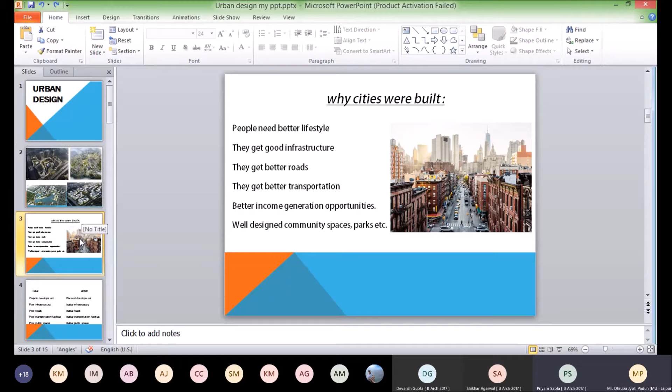So see, when you talk about urban design, these type of images comes to our mind, right? Buildings, transportation, roads, high quality green areas, parks.

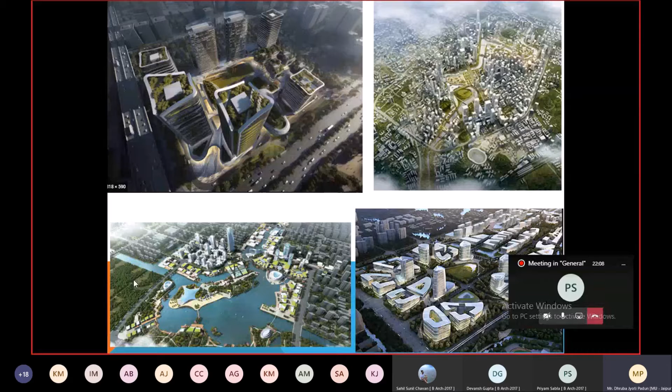So we have discussed these things. The cities where people need a better lifestyle, they get good infrastructure in cities. They get better roads, better transportation system, better income generation opportunities, well-designed community spaces, parks, etc. So these are some reasons why cities were built when they started to get civilized.

Okay, so let's see the difference between the rural area and an urban area. We have discussed how rural settlement is more organic in nature, and in case of an urban settlement, it is planned. In rural areas, we get very poor infrastructure, poor buildings, poor roads, poor transportation facilities, poor public spaces - poor because these are not properly designed or not properly maintained. On the other side, in an urban settlement, we get better roads, better infrastructure, better transportation facilities, better public spaces. So you could see the difference - a rural settlement is more organic, and an urban settlement is very planned or systematic.

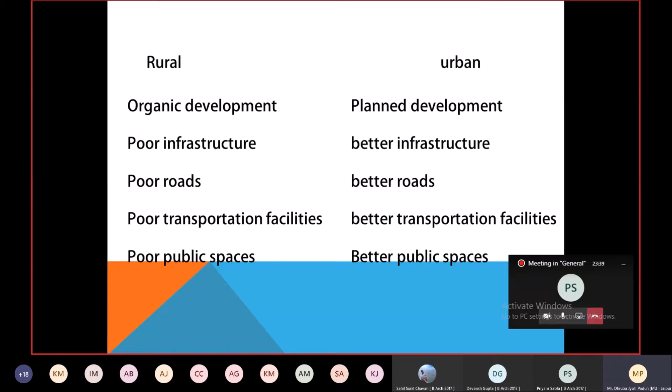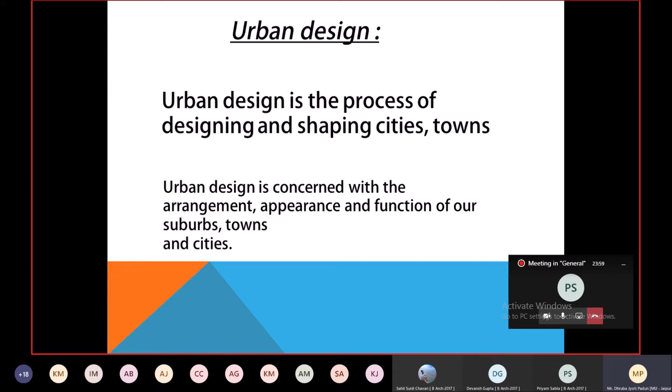So if you see the summary of urban design, urban design is the process of designing and shaping cities and towns. Urban design is concerned with arrangement, appearance, and function of suburbs, towns, and cities.

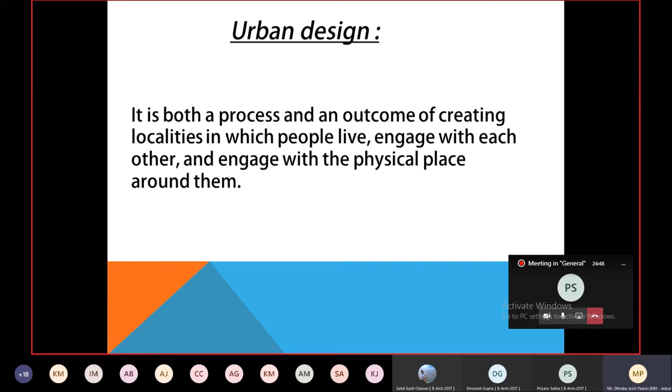When we talk about design, we can define design as an outcome or also as a process. The same theory applies here in urban design. It is both a process and an outcome of creating localities in which people live, engage with each other, and engage with the physical place around them. Once we design the space, the final outcome we can also call urban design, and the process through which we get the final outcome is also called urban design.

So urban design involves the arrangement and design of buildings, public spaces, transportation systems, services, and amenities. Urban design is the process of giving form, shape, and character to groups of buildings, to whole neighborhoods, and a city. So what does urban design mean? It is the process of designing buildings, public spaces, transportation system, services, and amenities. Got the point? What is urban design?

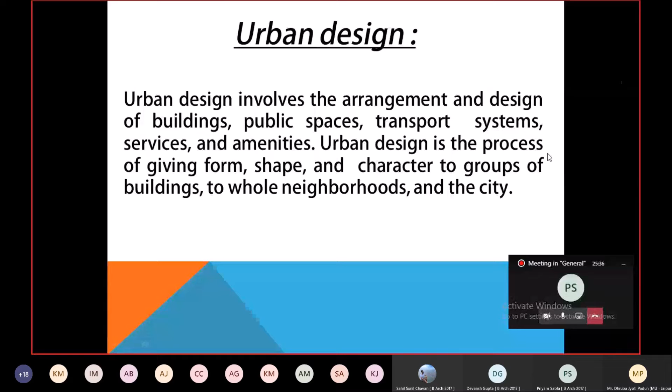When we talk about Varanasi as a city, there are different perspectives connected with it - the perspective of religion, the perspective of human life and death, the perspective of different shapes of buildings, temples, Hinduism, the concept of immortality. So all these perspectives are related or connected with the city of Varanasi.

Whereas if you see the city of London, we have very high quality lifestyle, high quality buildings, glass facades, good quality roads, high quality transportation system, information sharing system. So if you see that difference, it has to be there - that difference has to be there in the design of two different cities.

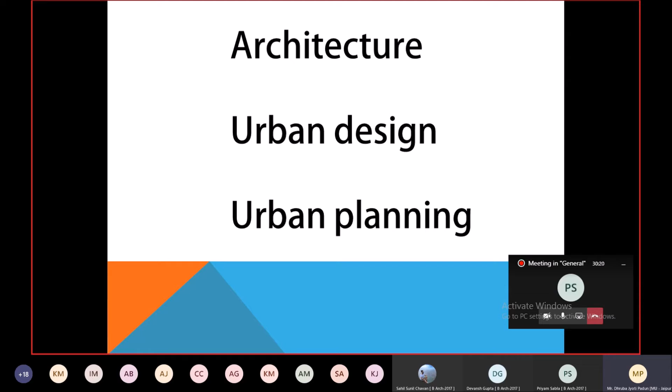We cannot separate these three terms individually: architecture, urban design, and urban planning. These three professions, or responsibilities, are related to each other. We cannot separate them, but still there are some areas where only an architect focuses, some particular areas where only an urban designer focuses, and some areas where only urban planners focus. So in that way, by what area one focuses on, we can separate these three terms: an architect, an urban designer, or an urban planner.

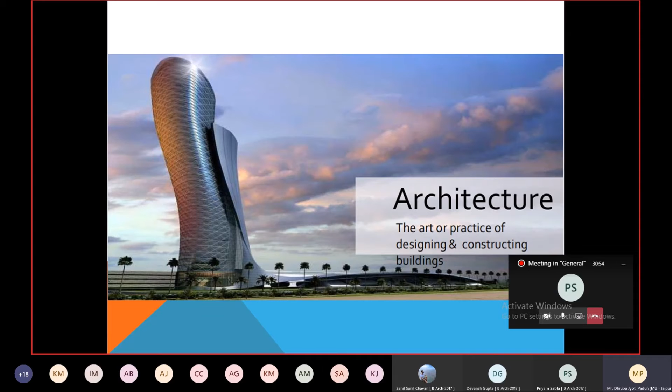So when we talk about architecture, we have already completed 3 years of architecture course, so I hope you now have a better understanding of architecture and architects. Basic architecture means design of a single building, maybe a couple of buildings connected to each other, but it basically talks about the design and construction of individual buildings.

But when we talk about urban design, it is the art of making places for people. In contrast to architecture, which focuses on the design of individual buildings, urban design deals with the larger scale of groups of buildings, streets, spaces or public places, neighborhoods, districts, entire cities, with the goal of making urban areas functional, attractive, and sustainable. An architect designs an individual building, whereas an urban designer designs a whole settlement, a whole city.

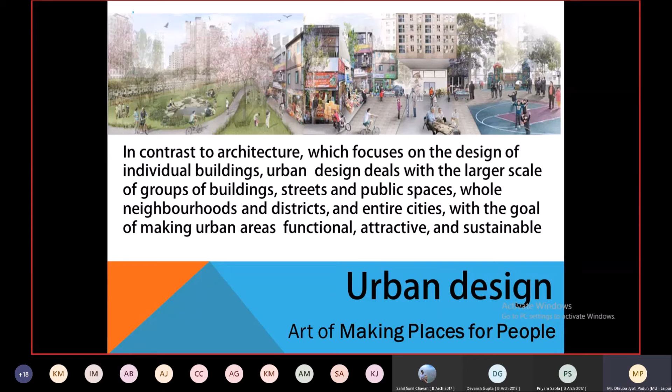An urban designer doesn't design a building. An urban designer designs a city. An urban designer designs the relation between the building and the outdoor spaces — the relation between a building and a park, a building and a streetscape, a building and the public plazas. So it is the responsibility of the urban designer to create the relation between all these spaces.

So these are some terms which are related to urban designers. When an urban designer designs an urban area or urban setup, he has to talk about the imageability of the area, the legibility of the area, streetscape, public squares, human scale, enclosures, linkage, urban vision, quality of public realm. So we have just discussed how Varanasi is different from the city of London.

So that imageability — how a new visitor has got an image of a city — that imageability of that particular urban space has to be given by an urban designer. It is the sole responsibility of an urban designer to maintain the imageability, to maintain the character, to maintain the culture through public spaces, through urban spaces.

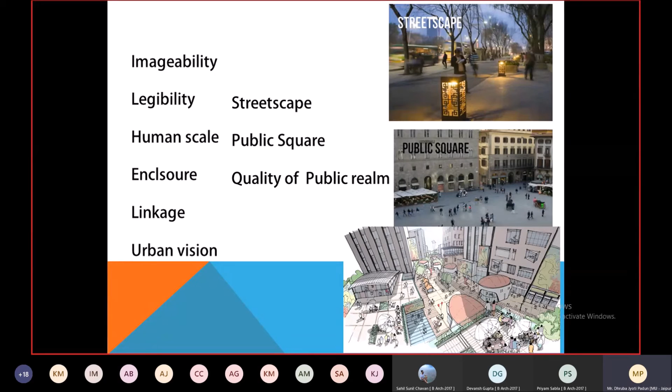Legibility, streetscape, human scale, enclosure - all these terms are related to urban design. So when we talk about urban planners, they focus on...

Apart from urban design - urban design is always a part of urban planning - urban planners also focus on transportation planning, policy making or policy planning, land use planning, economic development, housing, and disaster management. These are a few examples of areas where urban planners focus.

Apart from these areas, there are a few more areas where urban planners focus on when they design an urban setup. They have an important role in policy making and in transportation planning and management of a city - which road should lead where, which nodes should be placed where, which landmarks should be located where. All these things need to be properly planned by an urban planner.

Policy planning, then land use planning - you will get to understand land use plans when you involve yourself in urban design projects. A land use plan talks about, in a particular area, which zone is allotted to what type of activity. If a residential setup or residential activity is happening in a particular area, that part is totally dedicated to residential use.

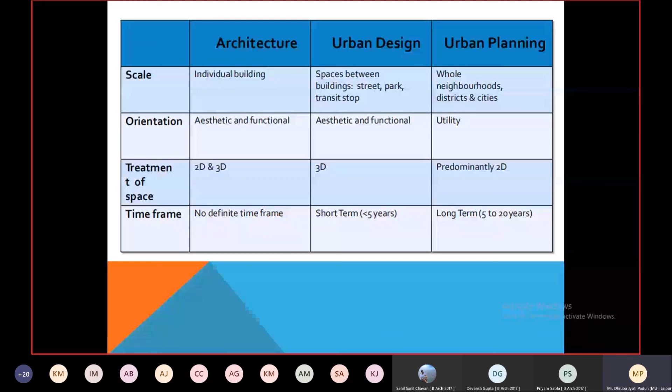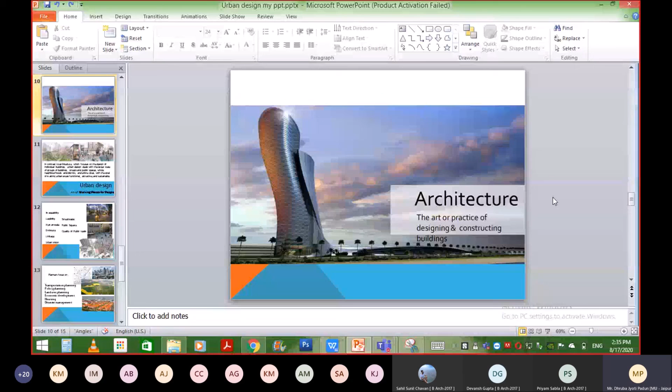So this is how the job of an architect, the job of an urban designer, and the job of an urban planner are a little different in nature. This was the basic introduction about urban design and the difference between architecture, urban design, and urban planning. I hope you have got the points properly.

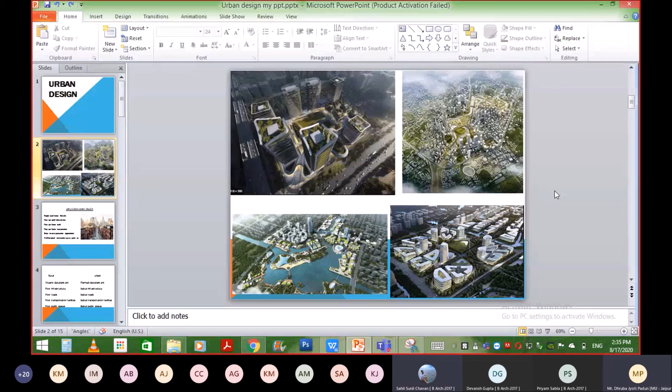No, sir. No, sir. Okay, good.